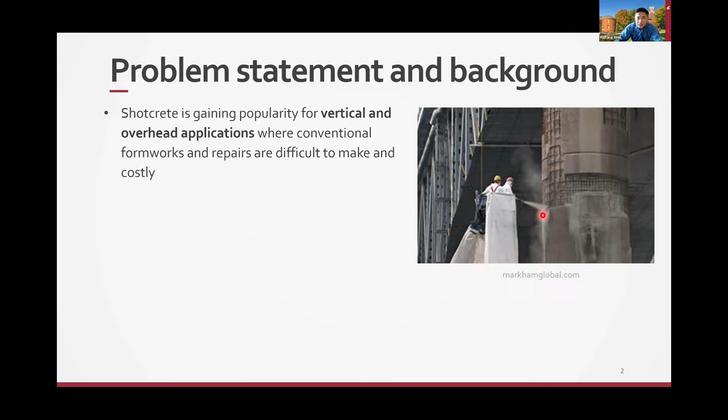For this topic, as many of you know, shotcrete is getting more popular for vertical and overhead applications because it's very easy to apply relative to traditional concrete, as you have seen from the picture on the right side. Past studies have shown that shotcrete itself as a material is similar to conventional concrete in terms of material properties like strength, splitting strength, and other material properties.

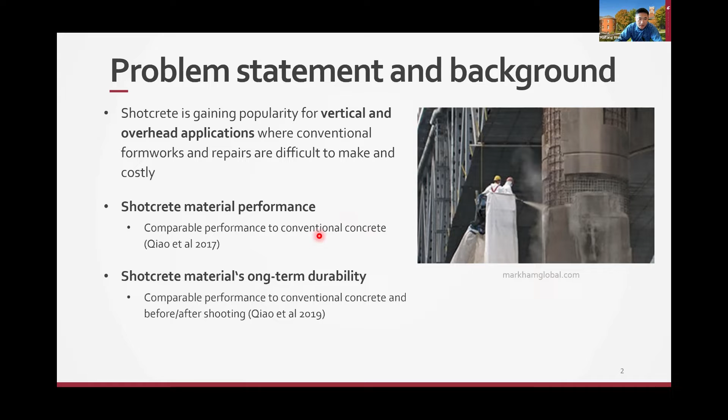Also, previous studies have shown that in terms of long-term durability, such as freeze-thaw, there was not much difference between before and after the shooting. As you've seen from the picture, this shotcrete was shot onto the structure instead of cast like conventional concrete. So there was a concern that before or after shooting, the properties of the concrete may have changed, but based on previous studies, we have not seen much difference.

One concern is that when you apply the concrete to an existing structure, especially, the bond between the new shotcrete and the existing structure will be an issue in terms of bond. So that's the topic of today.

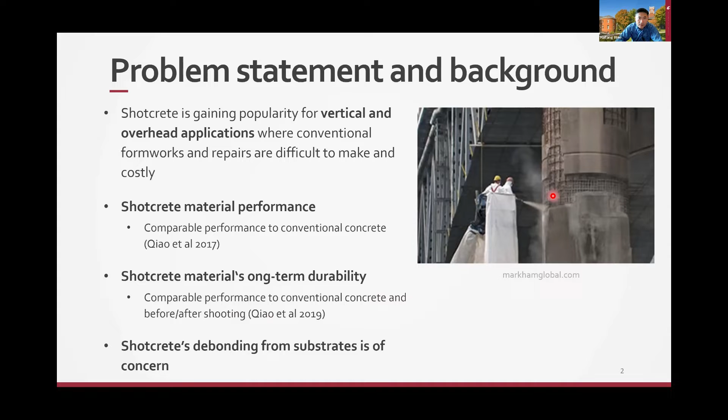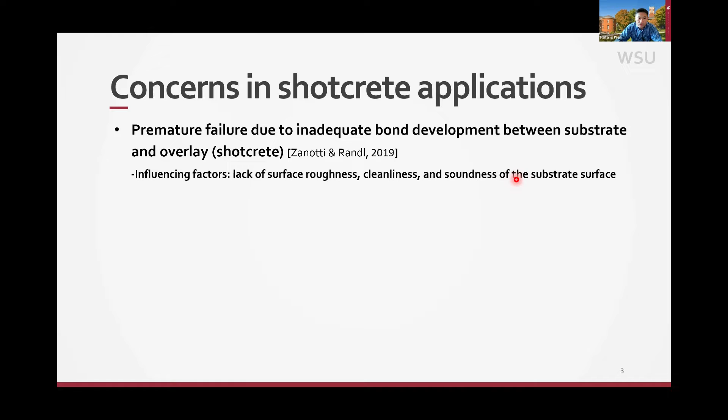Studies have shown that there could be a few factors that affect the bond between the shotcrete and the substrate, whichever it is, either existing concrete or existing shotcrete. The factors that can affect the bond between the two layers of material can be roughness—is it smooth or rough—is it clean, or is there debris, or even the curing compound. Or whether the existing underlying material is in good shape or has deteriorated. So all of those can affect the bond performance.

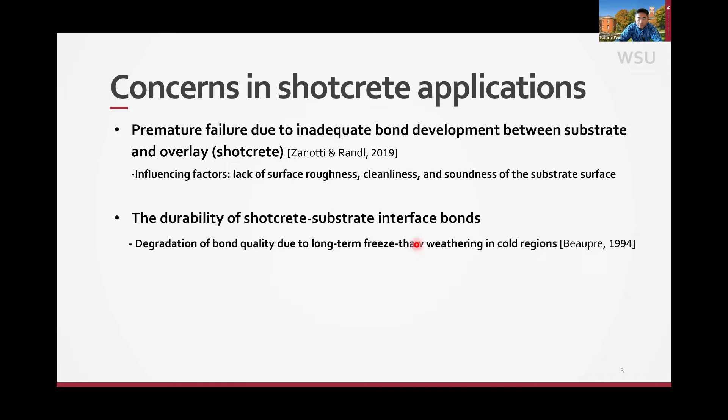The other performance concern can be related to freeze-thaw, especially in cold areas. The freeze-thaw may affect the bond performance in the long term.

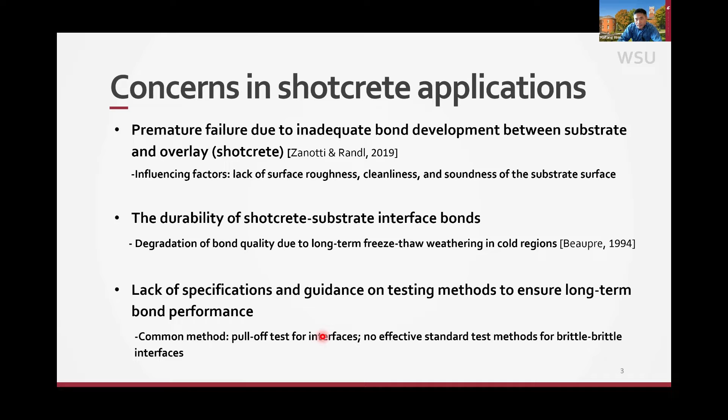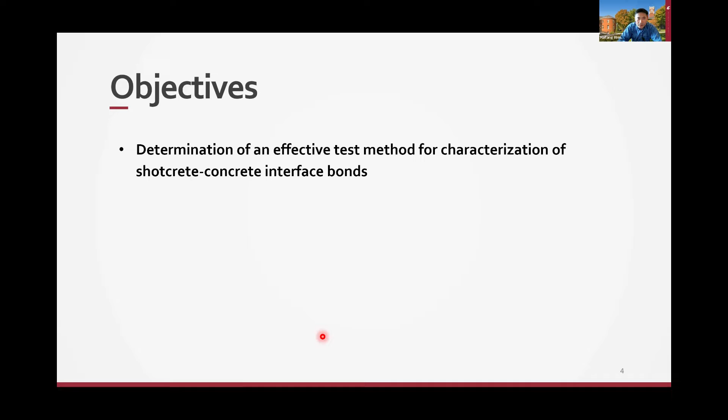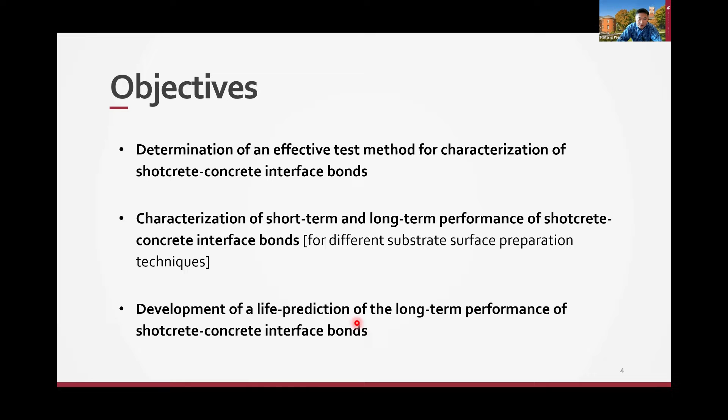Currently, there's a lack of specification or guidance on the test method to ensure long-term performance, specifically what test to use and what surface preparation to do before you apply the shotcrete. So the objectives of this study: number one is to determine if there's a test method that can capture the bond performance; number two is what kind of surface preparation we need to do for the substrate so we can achieve good performance; and number three is what's the life of the bond between the shotcrete and the substrate, for example concrete.

So for this study, we've examined the materials and the tests. Traditionally, for overlay performance, you have the substrate, which is either concrete or existing shotcrete.

You apply the shotcrete, then drill into the substrate and use epoxy to attach a steel disc, and pull until there's a failure. The failure can be within the substrate, at the interface, or within the shotcrete, depending on the conditions of the shotcrete, the bond, and the substrate, whichever is stronger or weaker. So it can happen in all those three scenarios.

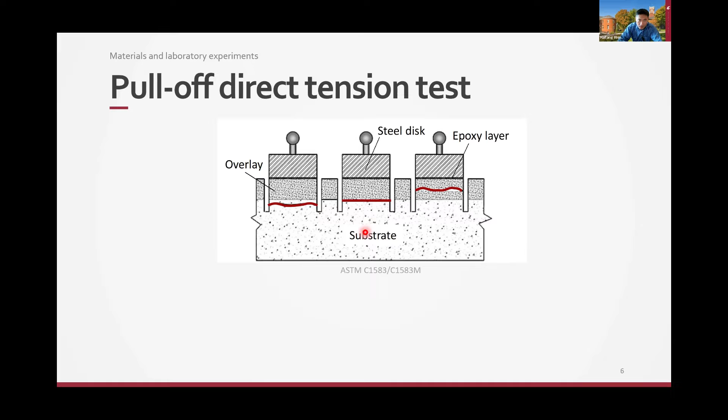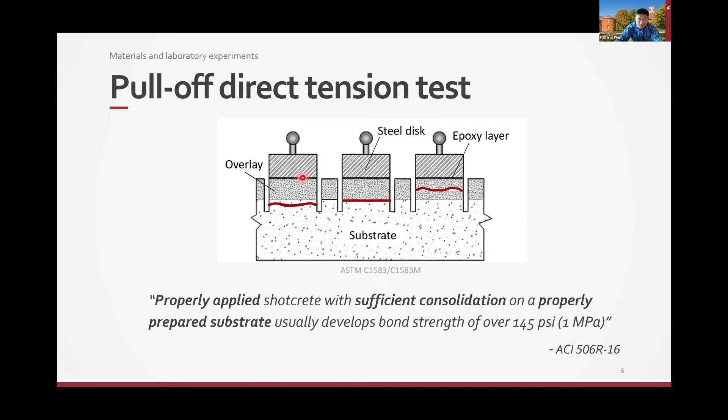The ACI has some numbers for the pull-off test, we call this one pull-off test. Typically, the bond strength needs to be 1 megapascal or 145 psi. This test method is typically used in the field and is not that easy to do in the laboratory. That's why we try to come up with some new test method for the laboratory.

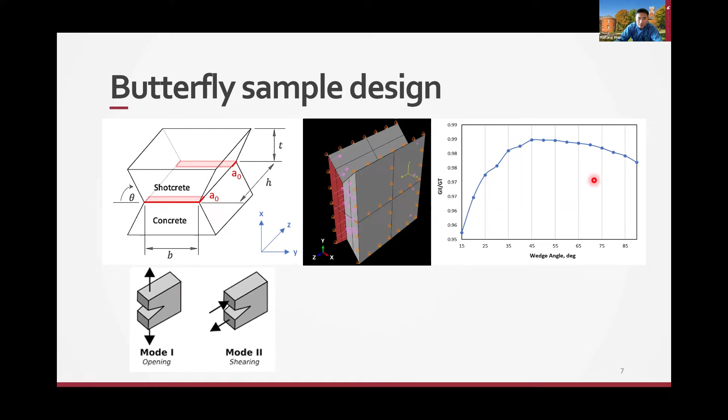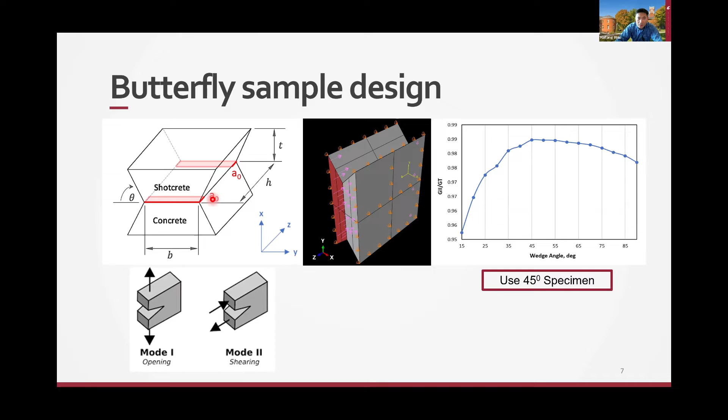This is based on finite element testing, and the design angle was determined to be 45 degrees based on the finite element results. That's the angle you see here, the 45-degree angle. The advantage of using this butterfly test sample is, number one, it grips better.

Because you have this wedge here, compared to a cylinder sample where you typically have to anchor it, this one you can use the friction and support from the wedge to pull the sample, so it grips the material better, and it's a relatively small size. You can do it in the lab, apply the load, and minimize the bending.

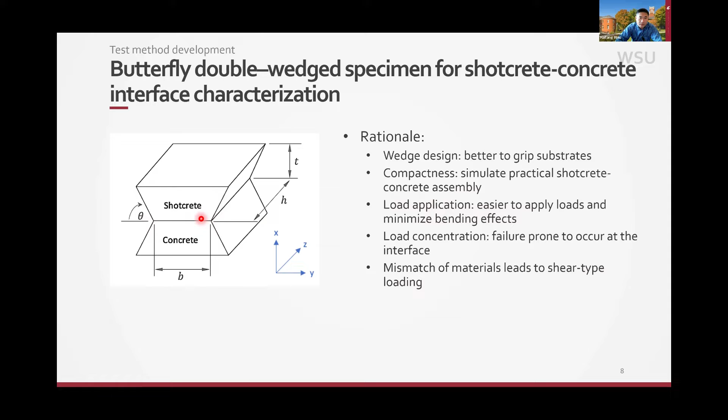For a tension test, bending is a concern, so sometimes you don't know if the failure is due to tension or due to bending. By doing this method, there's potential to minimize the bending, and because of the shape, we can almost guarantee that the failure will be at the interface or close to the interface. So those are some advantages of using this sample design.

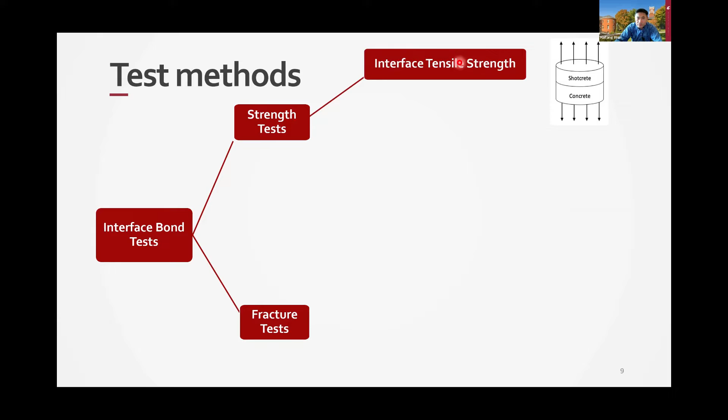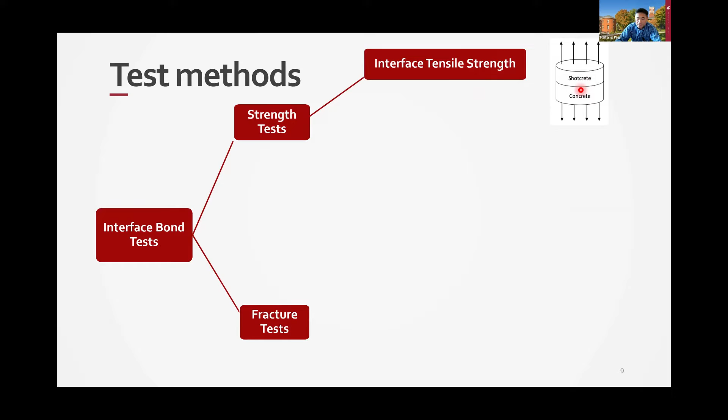In terms of the bond test, we've tried two types of bond strength tests. One is the strength test, the other is the fracture test. For the strength test, one of them is the tensile strength. As you've seen from the slide, you make a sample of the concrete and overlay, you pull it, and hopefully there will be a bond failure at the interface.

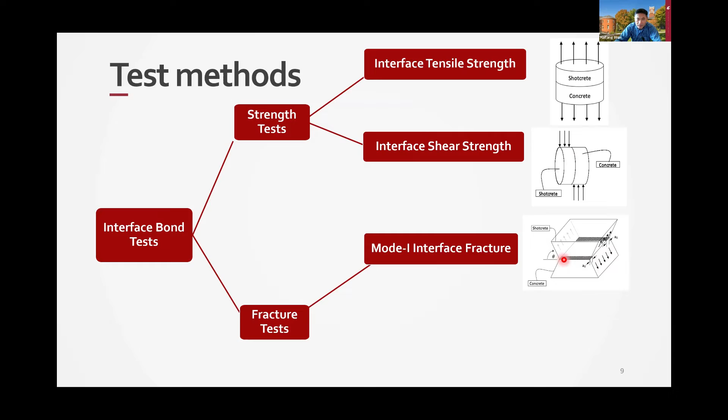The other one is the shear interface test. You support it on one side, push down from the other side, and there will possibly be a bond failure at the interface. The other test is the fracture test, that's the butterfly we're talking about. For the mode 1 test, you'll be pulling with the crack, the existing notch, already in place, that's the mode 1 test. Then you have mode 2, where you'll be doing the shear test instead of tension, that's the mode 2 fracture mechanics test.

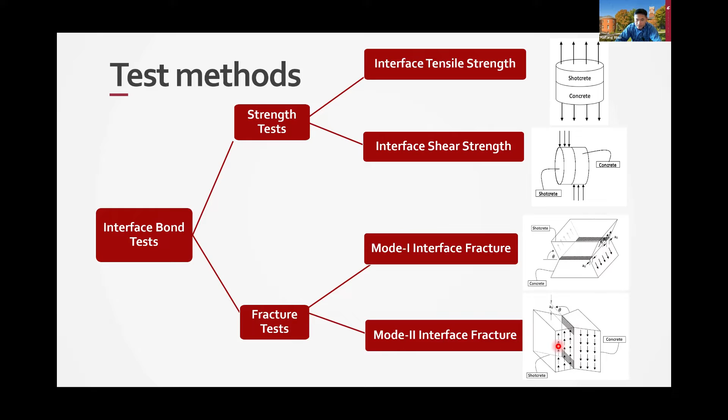These are the materials we used in this study. You have the existing cast-in-place concrete, and then the shotcrete mix design. These are from previous studies that came up with these two mix designs.

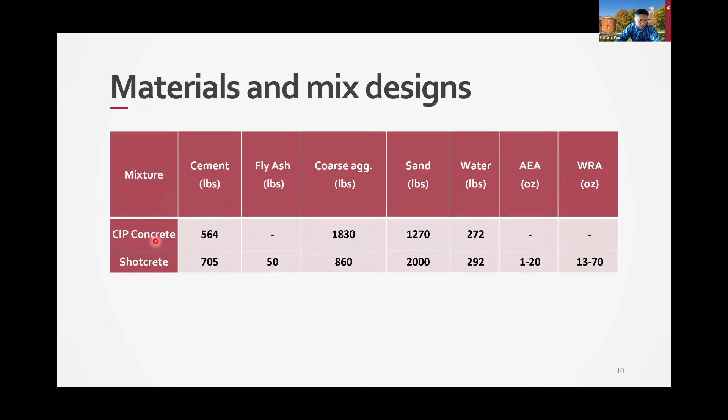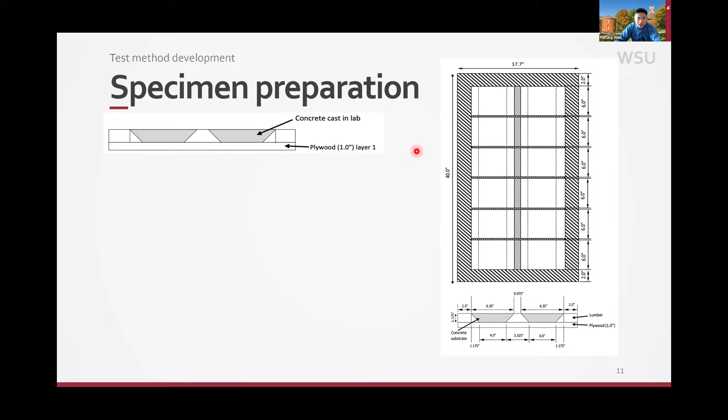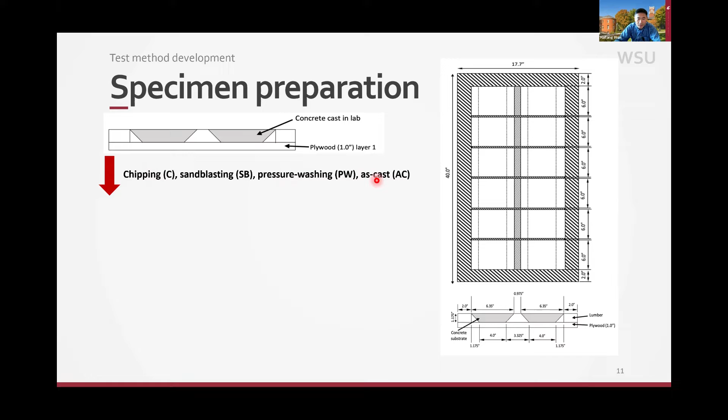For the sample preparation, especially for the butterfly samples, you cast the concrete in this panel to make the different samples, casting the concrete in the plywood. Then we do the surface preparation of the concrete, either chipping, sandblasting, pressure washing, or you don't do anything to the existing concrete, we call that 'as cast.' Then you flip it over and place the shotcrete. Here's an example of the concrete before application of the shotcrete.

So we use three different methods, or specifically four. One is sandblasting to prepare the concrete surface and make it a little bit rough, or use the water pressure method to make the surface rougher before you apply the shotcrete, or you use the chipping method to make the surface even rougher.

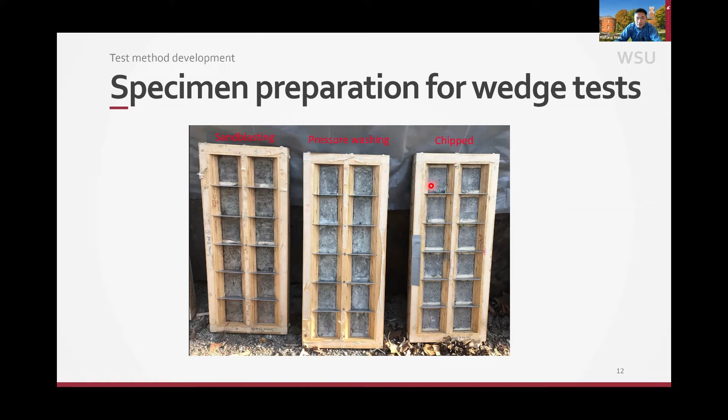The company called Coco Construction helped us do this surface preparation: sandblasting, pressure washing, chipping. After that, they clean up the surface, remove the dust, and shoot the shotcrete into the panel. So that's the preparation, and then from there you get this butterfly sample.

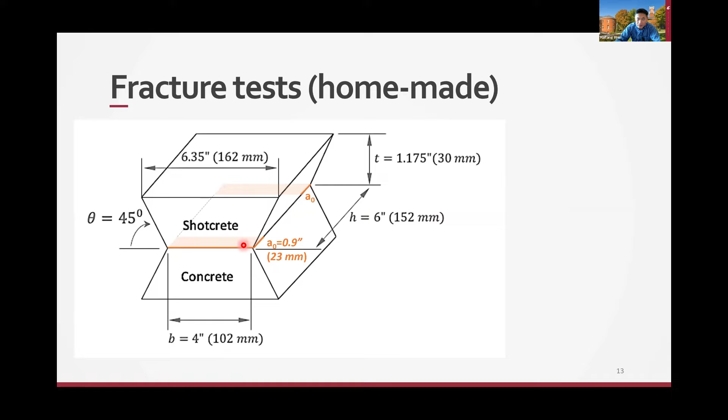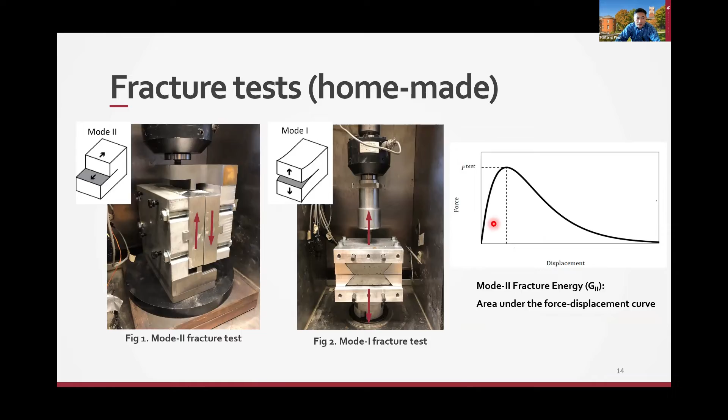The other test is the strength test. For the strength test, which is different from the butterfly test, you prepare these panels of concrete, still doing surface preparation using the pressure washing method to make the surface rougher, hopefully increasing the bond, or the chipping method, or the sandblasting method. So all the intent was to make the surface a little bit rougher, hopefully making the bond higher.

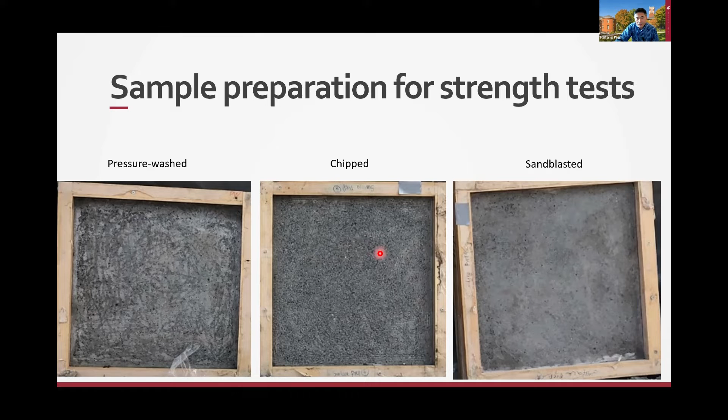After you do the surface preparation, you blow off the dust, and then you shoot the shotcrete vertically onto the panel. Then you bring it back to the lab and use the water jet to cut the sample this way, and you can drill it using the coring method.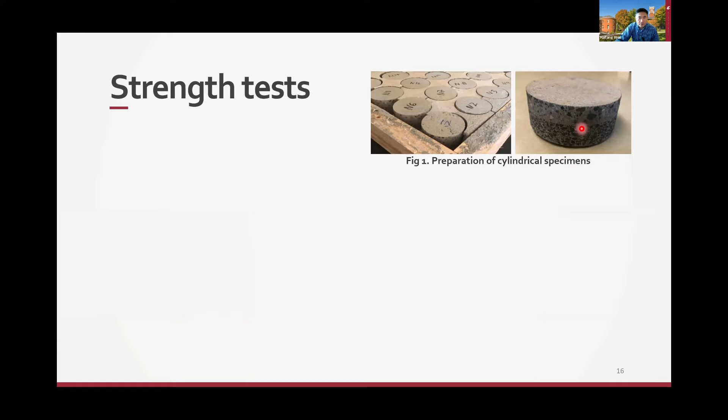The problem is that during drilling, you're applying torque and shear, which can possibly damage the bond. Sometimes the bond can be really weak. So then you get this sample, and you can do the tension test, pulling the sample, which can result in bond failure between the shotcrete and the concrete substrate.

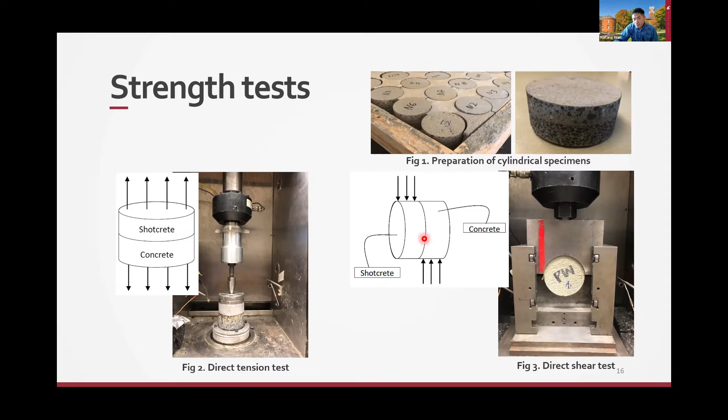Okay, so that's one of the test methods, the tension test method. The other one is the shear test, where you have support on one side and then push down from the other side. There will be a failure in the interface of the bond. So that's the shear test.

So in terms of the results, let's look at it. If you look at the blue one, that's the tensile strength. The chipping method gives you the highest tensile strength, followed by the pressure washer surface preparation, then sandblasting, and doing nothing gives you the lowest. So any surface preparation would increase the bond strength, especially the chipping method.

The ACI has a specification: it needs to be like 1 megapascal or 145 psi for the tensile strength. If you look here, only the chipped surface preparation and the pressure washing give you bond strength higher than 145 psi. The sandblasting is a little bit lower, and the as-cast, meaning no surface preparation, gives you the lowest bond.

For the orange one, that's the shear strength. You can see the chipped surface preparation gives you the highest shear bond, and interestingly, followed by sandblasting, which gives higher shear bond than the pressure washing, which is a little bit opposite compared to the tensile, where pressure washing gives higher tensile strength. In any case, the as-cast gives you the lowest strength, either tensile or shear.

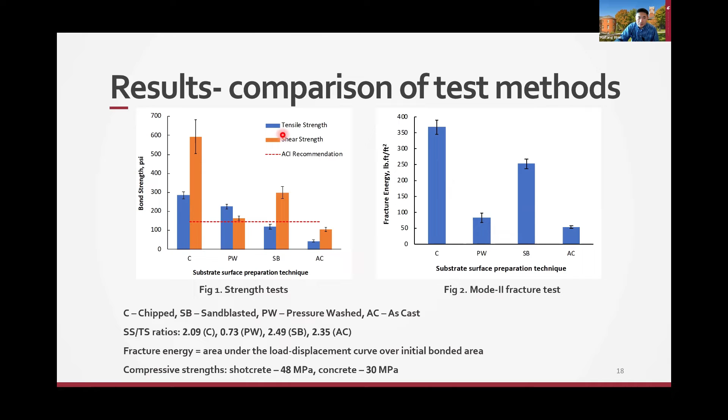For the interface failure, there can be two typical failure methods. One is adhesive failure, which means it's happening between the aggregate and the paste. The second mode of failure can be cohesive, happening within the paste and the interface.

So we use the imaging method to look at how much aggregate is exposed. That gives us an idea of whether it's adhesive failure or cohesive failure. If it's adhesive failure, happening at the aggregate and the paste, you will see more aggregate or rocks exposed. Based on the imaging method, you see the chipped method has more aggregate exposed, followed by the pressure washing method, then sandblasting and as-cast, which has the least aggregate exposure.

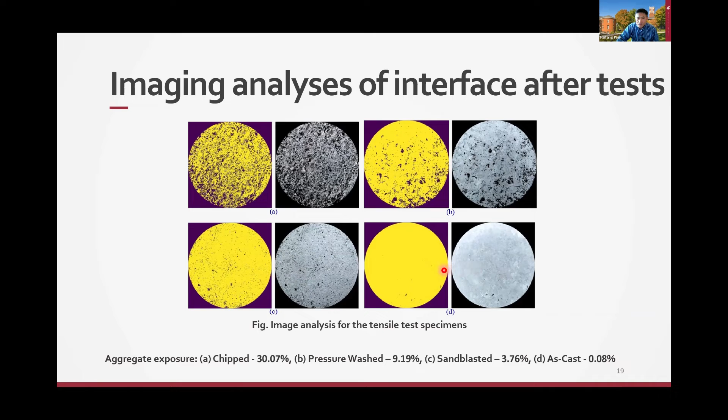That also explains why, after the tensile test, the chipped method gives you the highest tensile strength, followed by pressure washing, sandblasting, and do nothing. So that's the adhesive failure and the cohesive failure.

In terms of the roughness of the surface, especially for the concrete substrate, we want to measure the texture, how rough it is. So we use laser scanning to scan the surface. You'll see the chipped surface preparation gives the highest surface texture or roughness, followed by sandblasting, then water pressure washing and as-cast.

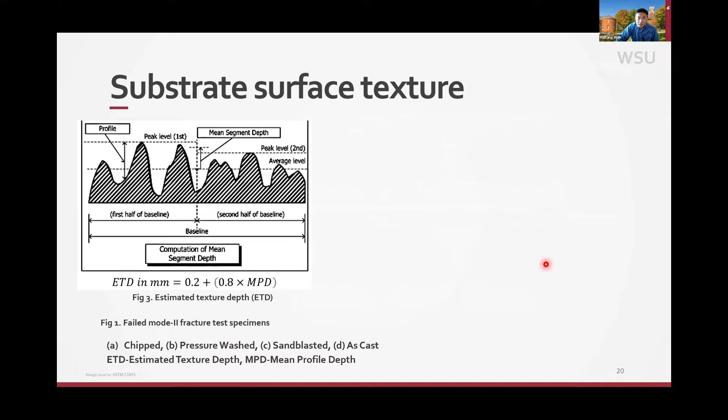That kind of explains why for shear, which is sensitive to the texture, the chipped method and sandblasting give you higher shear strength. So that's from the laser scanning.

We also look at the relationship between the normalized tensile, normalized shear, and normalized fracture energy. Normalized means relative to the as-cast surface preparation. We look at the relationship between those normalized bond strengths and the texture depth from the laser. In general, the trend is if you increase the texture depth, you'll see bond strength increase.

This is especially true for fracture and for shear. For tension, it's a little bit more scattered, shown in blue. So I think shear is more related to the texture of the surface compared to tension. From here, if you look at the standard, we probably look at somewhere here that gives you enough shear strength.

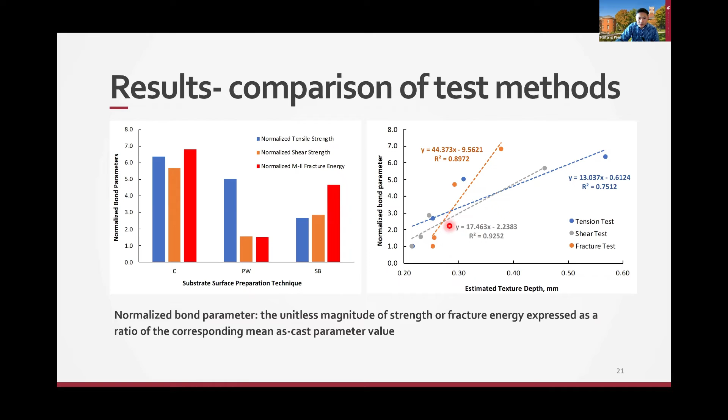Then we look at the long-term durability of the interface bond, specifically using the freeze-thaw method. For freeze-thaw, it can affect the bond or accelerate bond failure because the water will be freezing and pushing the material away from each other. This can also be related to the air void content in the system.

Typically what you do is perform the freeze-thaw test in a chamber, based on ASTM C666, cycling the temperature from -18 to 4 degrees, doing 8 cycles a day. Each time you measure the dynamic modulus, and ASTM recommends that after 300 cycles of freeze-thaw, you're supposed to retain the dynamic modulus by 60% or higher. That's one indication.

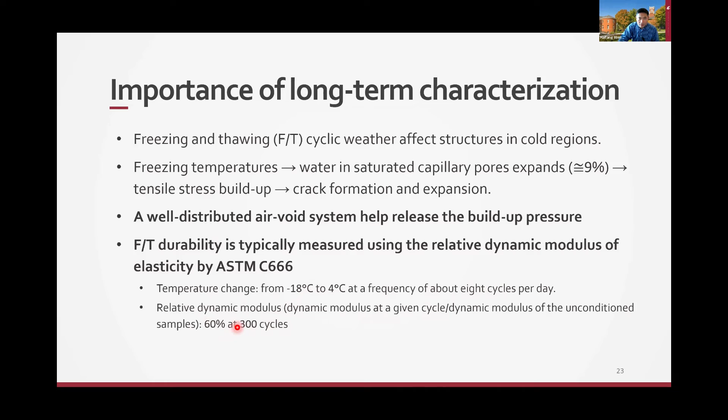In this case, we put the samples in the chamber and did the freeze-thaw cycles. We didn't do the dynamic modulus test, but instead did the strength test or fracture test every 100 cycles - at 0, 100, 200, and 300 cycles, as you can see here. As you increase the freeze-thaw durability cycles, all the strength will be decreasing. This is the tension result.

The same thing applies for the fracture energy. We only did 0 cycles and 300 cycles, and you'll see there's quite a decrease of the bond strength. ASTM states that after 300 cycles, the dynamic modulus should retain 60% or higher, but we don't have dynamic modulus data. If we use strength as an indicator to check for 60% retention, only the chipped method can give you 60% or higher retention after 300 cycles of freeze-thaw.

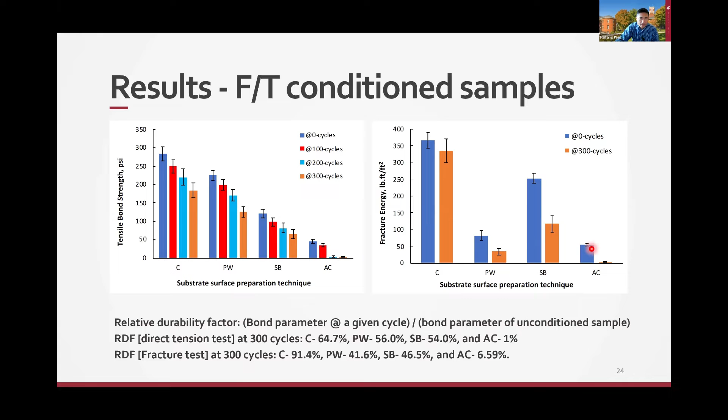Some of the bond is really weak, especially for the as-cast. It didn't even survive the 300 cycle sometimes, just falling apart itself. So if you look at the trend here in general for any of these tensile strength, for different surface preparation, you'll see that when you increase the cycle numbers, they all start decreasing to different levels.

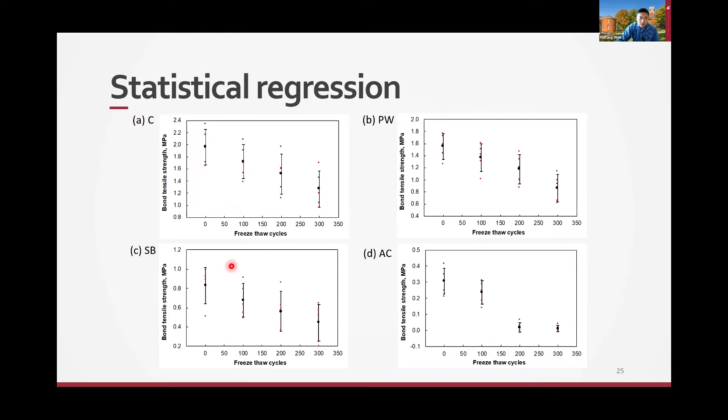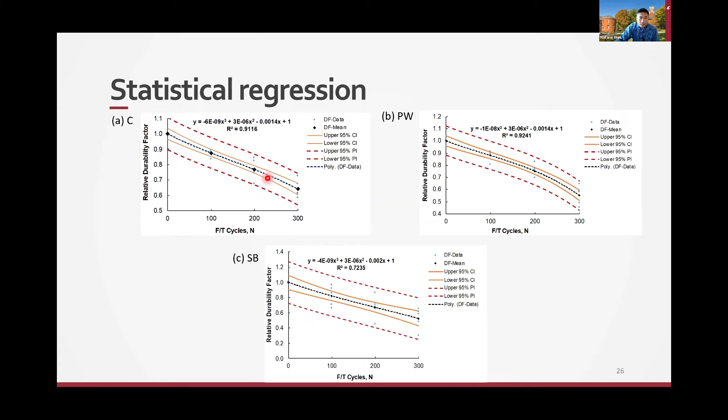You can try to fit the curve a little bit using different models, polynomial or different ways, so you can do some statistical analysis. And what we'd like to know is how long they can survive the weathering for this bond.

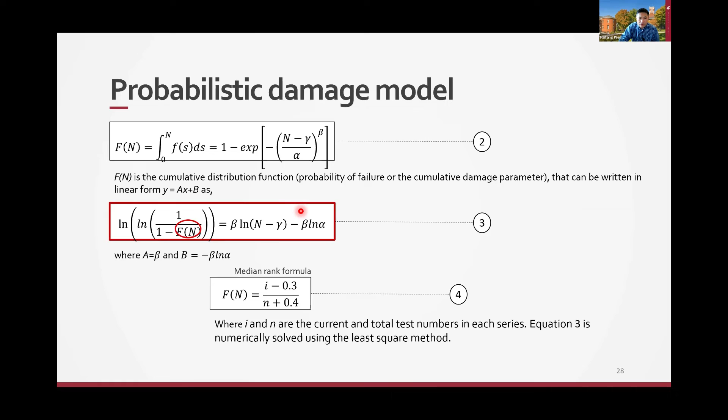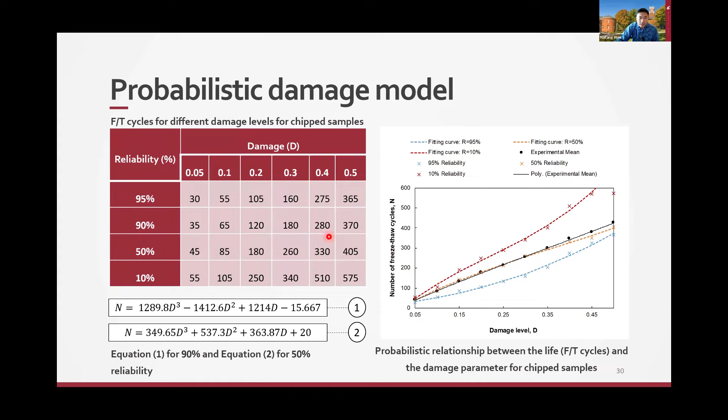So we feed the data into this probabilistic damage model, trying to quantify the relationship between the freeze-thaw cycles and the bond deterioration. Those are some of the models we used, and I'm not going to go through in detail. Basically what you'll see here depends on the reliability and the damage, how soon, how many cycles it takes them to reach failure, and also based on the weather condition in eastern and western Washington.

We know that eastern Washington and western Washington have different climates. On the east side, there are more freeze-thaw cycles. Based on a previous study, they predict one year is almost 40 cycles of freeze-thaw in Pullman. On the west side, at SeaTac Airport, they only have a couple of freeze-thaw cycles. But that depends - we studied another database, and they predict a slightly different number of freeze-thaw cycles for the west side and east side.

So on average, we take the average. For the east side in Pullman, we take an average from different studies - like 42 cycles of freeze-thaw a year versus only 6 or so on the west side.

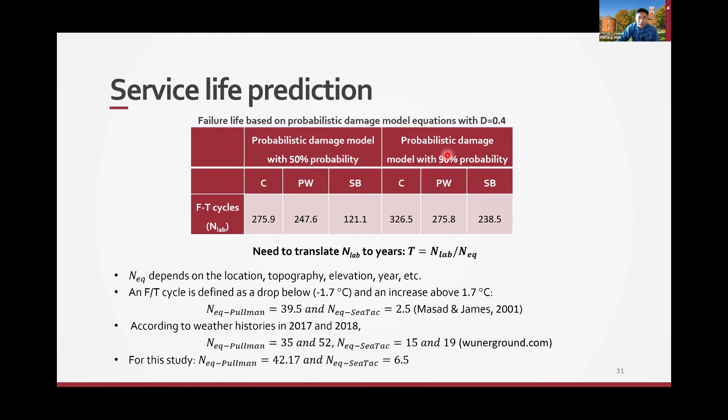You'll see the number of cycles for the west side and east side, and also for different probabilities - 50% and 90% probability. You'll see that the life of the bond for eastern Washington, using the Pullman example, only can last for a few years, then it will drop to 60% or lower for the 50% probability.

While on the west side, it can survive a few decades, again depending on the surface preparation method, which gives you a longer life of the bond - chipping and pressure washing. For 90% it's a little bit different, but you can see the difference between eastern Washington and western Washington - in eastern Washington, within a few years the bond will be considered failed, while on the west side it can last a few decades.

Again, Pullman is just one city for eastern Washington, and if you go to different places, the weather may be different from Pullman, so the life here will be a little bit different. Some cities are a little bit warmer than Pullman, some areas in eastern Washington a little bit cooler, especially getting into the mountain areas. On the west side, this is the airport area.

Another consideration is that we consider the worst case, which means whichever the surface freezes down. But we know for concrete, depending on how deep or thick it is, it takes time for the frost to penetrate the concrete. So if the concrete or shotcrete is thicker, the number of freeze-thaw cycles will be lower, which means the service life will be a little bit longer than what you've seen here. This is the worst case we're using as an estimate.

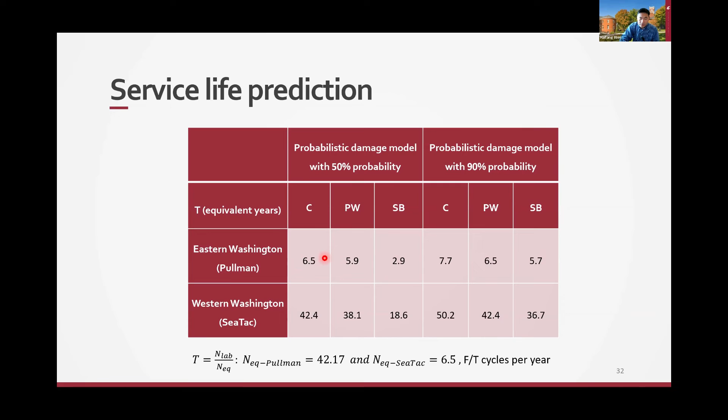So basically, the bottom line from this study, which looked at the shotcrete and concrete bond for tensile strength, is that there are different scenarios. For tensile, sometimes you apply the shotcrete overhead, like in a tunnel or overhead areas, where tension is very important because the shotcrete can fall down from the substrate. In that case, we see that the surface preparation - chipping and pressure washing - can meet the standard.

While the sandblasting and as-cast surface preparation did not, those are critical for the overhead. You don't want shotcrete or any material dropping from the overhead tunnel while there's a passing vehicle or pedestrian.

In terms of the shear bond, if you apply shotcrete using the slope method to stabilize a slope or landslide, we see the chipped method give you the highest bond, followed by sandblasting, pressure washing, and as-cast. So apparently the surface roughness of the concrete is critical for the shear bond.

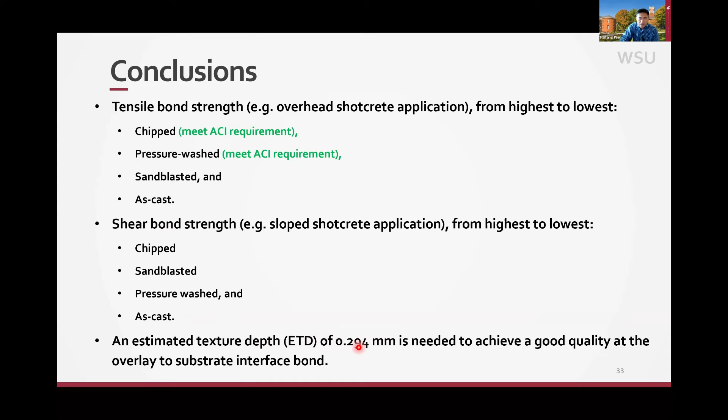And then the fracture energies from mode 2, the butterfly test, pretty much follow the same trend as the shear bond strength. In terms of freeze-thaw cycles durability, we saw the chipped method surface preparation give the best durability.

And meet that 60% retained strength if you use the chipped method, while the other methods didn't meet that standard. So definitely we would recommend that you have to prepare the surface.

And to a certain degree, depending on the location - if the project location has a lot of freeze-thaw cycles, like Eastern Washington, we will need to prepare the surface much better or do something else. Otherwise it will not survive many years.

While on the west side, which is a little bit warmer with fewer freeze-thaw cycles, the chipped method and pressure washing can give you a few decades of bond life.

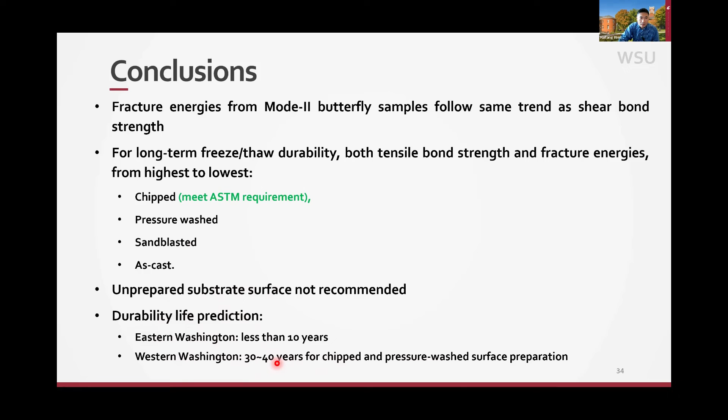And of course, there's more studies that need to be done. One is to look at the microstructure, look at the bond, why there's a failure, what kind of failure - adhesive, cohesive - all those things we need to look at more closely. And also look into other methods so we can increase the bond durability, especially in cold areas that have a lot of freeze-thaw cycles.

For example, adding steel fiber in the shotcrete has been reported to increase the durability of the bond. Or before you apply the shotcrete, you can apply a layer of cement grout, hopefully increasing the bond between the shotcrete and concrete. Or you can use a physical method using mesh or anchors.

So mesh can somehow support or even collect any debris from the shotcrete if it's falling apart. Or the anchor method - you are physically anchoring the shotcrete to the concrete or the substrate.

Another concern would be, especially on the west side, because of the seawater which has a lot of chloride, how would the chloride ion affect the bond durability? That'll be another concern - we recommend more studies.